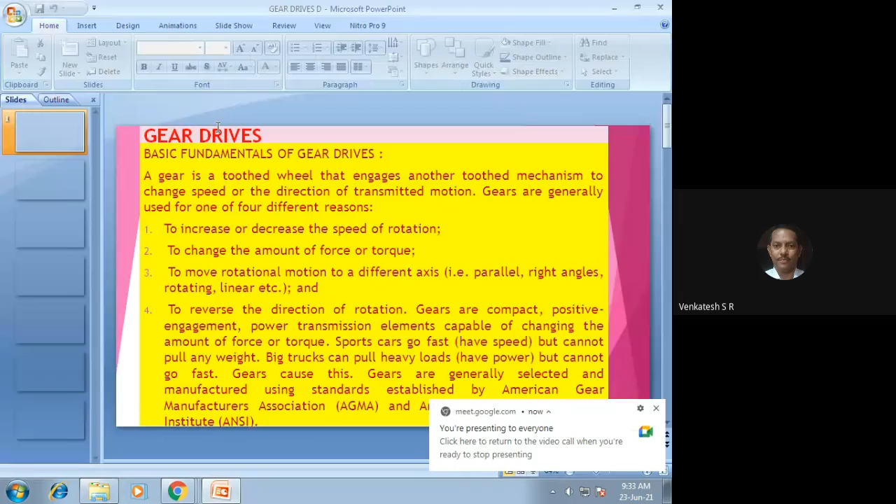See, yesterday due to some problem, it was stopped at helical gears. All of you observe. So this is the helical gear. If the shafts are parallel, at 0 degree, you can use the single helical gear set or herringbone gear set. In the examination, if you have this question, you write this diagram, no need to write this 3D diagram. You write this single helical gear set and show like this.

Usually this type of gear is used when the load is very, very high. For example, you might have seen the decorticator in the groundnut industry and oil industry. There they use helical gears for removing the oil from the seeds. They use helical gears because the load acting on the seeds is very, very high. This is the single helical gear set. In the examination, you have to write this diagram.

Next, come to the point, bevel gears. All of you write down bevel gears. Before that, write down helical gears. Helical gears are used for parallel shafts. The inclined line, the angle, this inclined line is called the helix angle. The inclination of this line is the helix angle.

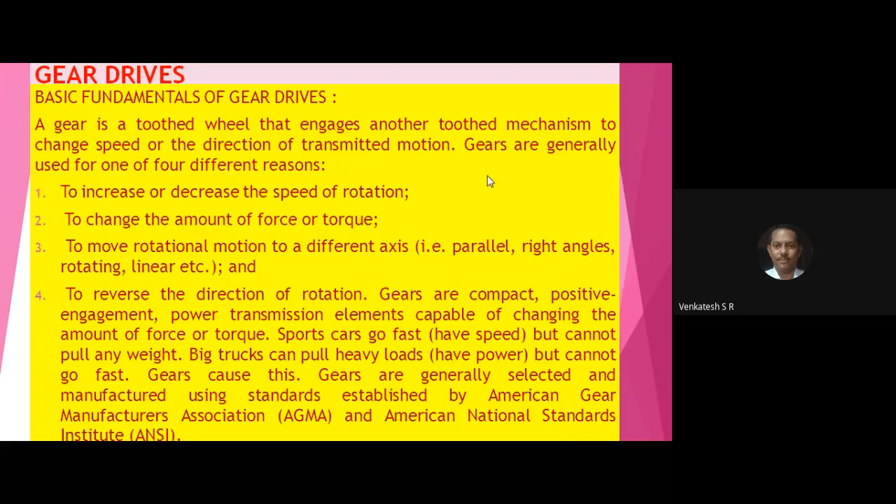Almost all question papers have this question in the examination. If you go through the previous 6 or 8 question papers, almost all of them have the question on gear drive. First portion of the question: what is gear drive? That is, transmit the power from one point to the other, or transmit the speed from one place to the other place, and the distance between the shaft is less, then only you can use gear drive. Otherwise, you can go for belt drive.

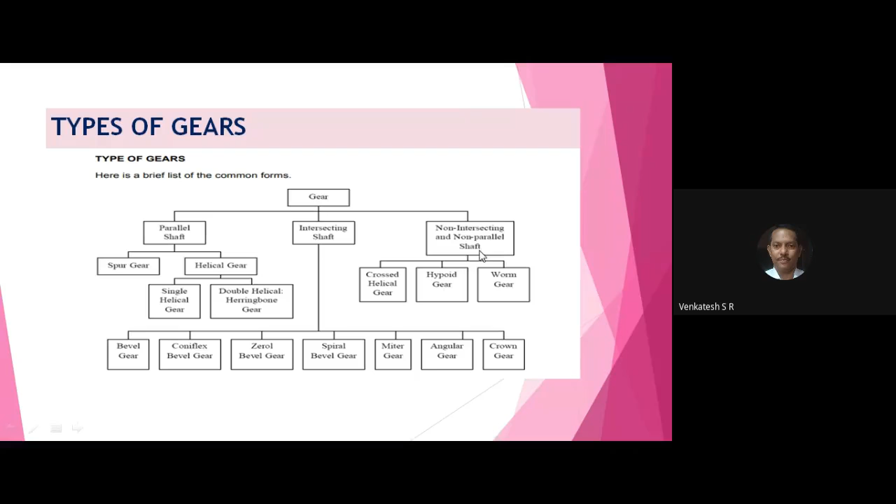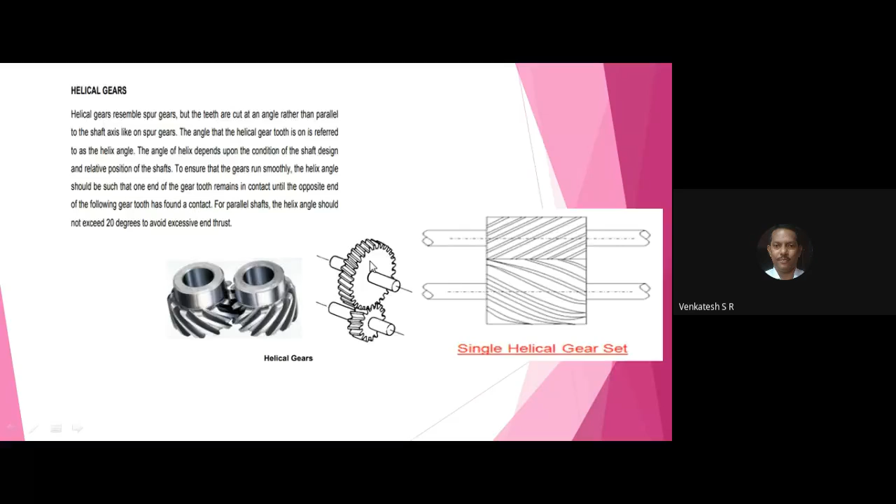In the types of gears, there are 3 types: parallel axis, intersecting axis, and non-parallel non-intersecting axis. According to that, you have the classification: parallel, intersecting, non-intersecting, non-parallel. Write the flow diagram or block diagram like this, and after that, explain briefly with a neat 2D sketch of a spur gear, helical gear, bevel gear, and worm gear.

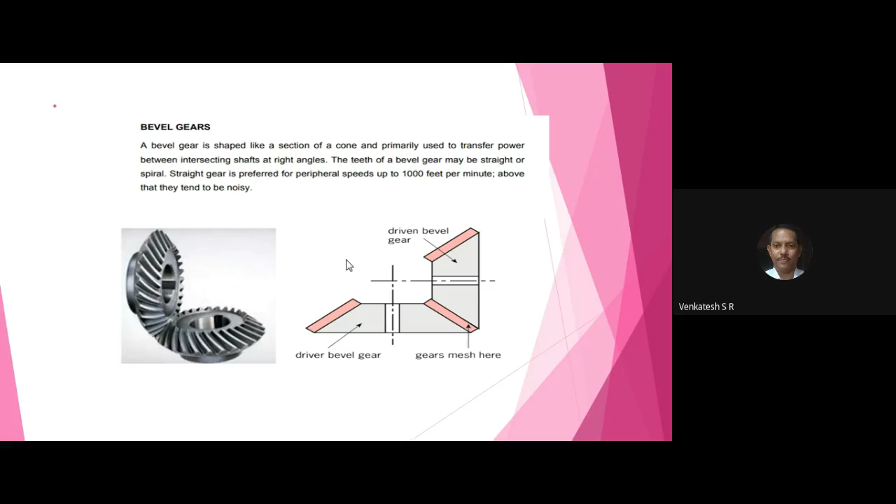This question carries 10 marks in the examination. You practice writing the diagram without observing the notes or textbook. Just go through the explanation and write the diagram. Write the explanation in your own sentence, no need to reproduce the same sentence. Writing in your own words carries more weightage than reproducing the same explanation.

This completes the gear drive.

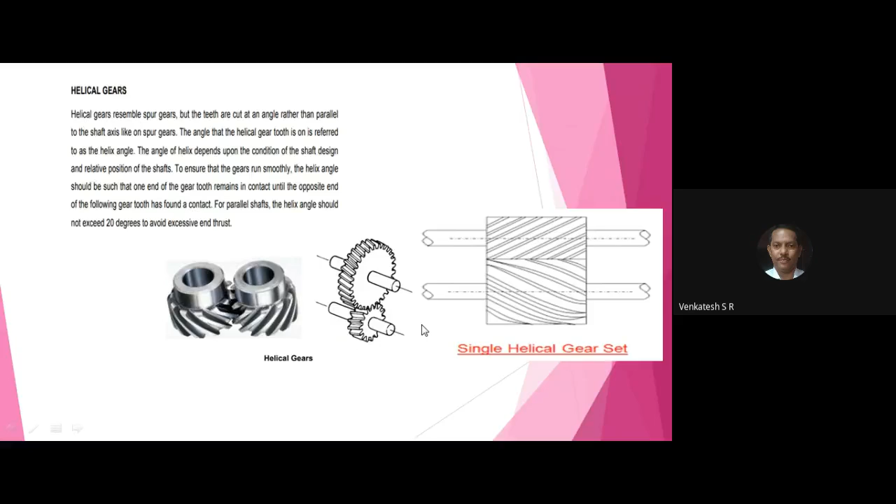One second. Now all of you please write down joining processes.

First point, write down the title: joining processes. First point, what is the necessity of joining parts or components?

And one more thing, without the joining process there is no life. Human beings require the joining process. Any item you take in your house, in the industry, or in the office uses joining processes. They are very much essential, joining of same type of material or different types of materials. That's very important, so without the joining process you cannot produce the component as a single piece. You can produce the parts individually and join them together to make the component. That's possible, that's very important.

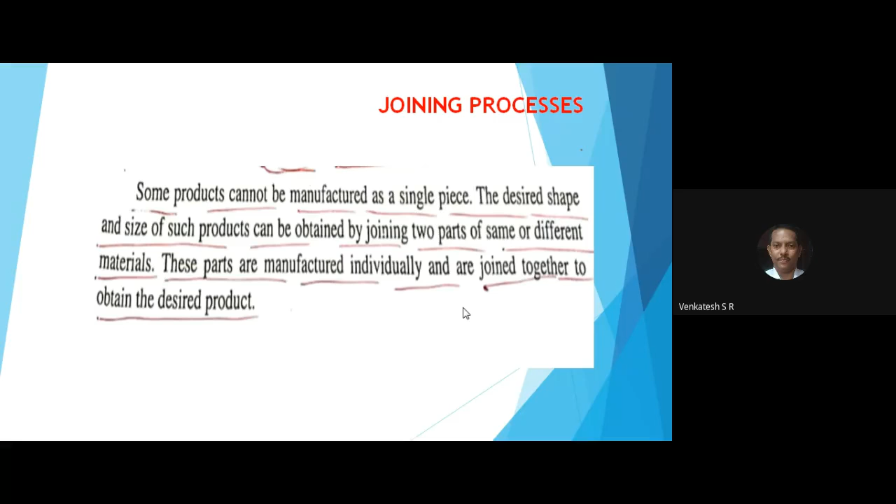These parts are manufactured individually and are joined together to obtain the desired product.

Next you write down a sentence: adhesive bonding, or using adhesive bonding, has less strength. You write down only this much: adhesive, using gum or synthetic resin gum. All of you heard the word Fevicol, the branded name of adhesive gum, Fevicol. It is actually a synthetic resin gum.

Adhesive bonding has less strength than soldering, comma, brazing, comma, welding, and mechanical fastening.

Using synthetic resin gum, if you join two parts, the joint can be removed anytime due to the effect of temperature or moisture, there may be chances of losing the joint. So for that reason, adhesive bonding has less strength than soldering, brazing, welding, and mechanical fastening. Mechanical fastening means using bolts, nuts, and washers.

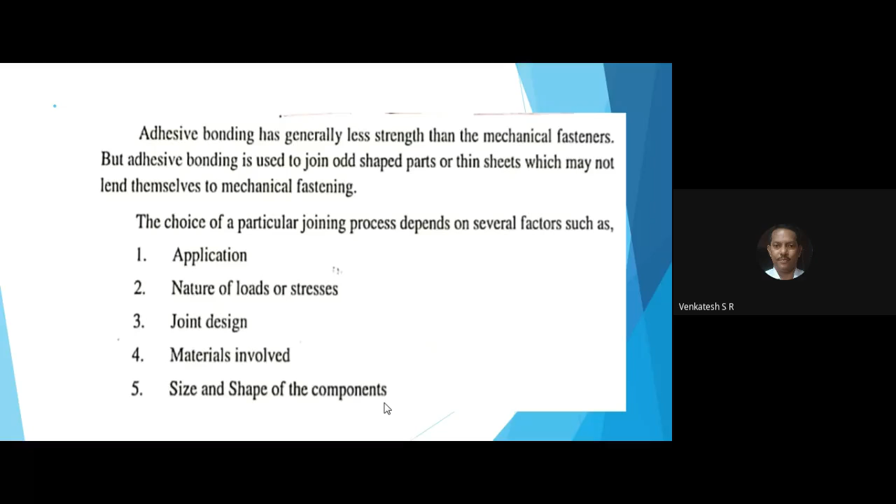Next, in the display you don't have the classification of welding process. Please write down classification of joining processes, underline that. You are all mechanical, civil, computer science or electronics engineers. Remember, if you write the title in uppercase letters, it indicates this is the title. From today onwards, in your lifetime, write all titles in uppercase letters, in any report, explanation or process. That itself says that this is the title.

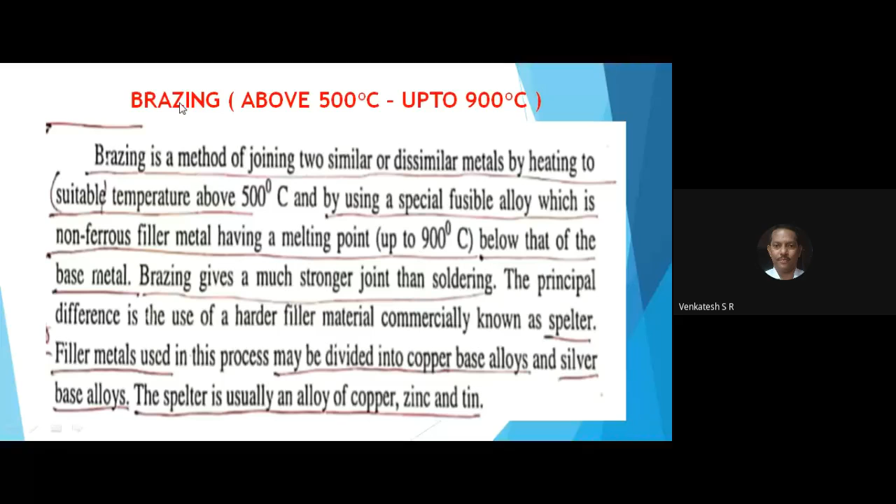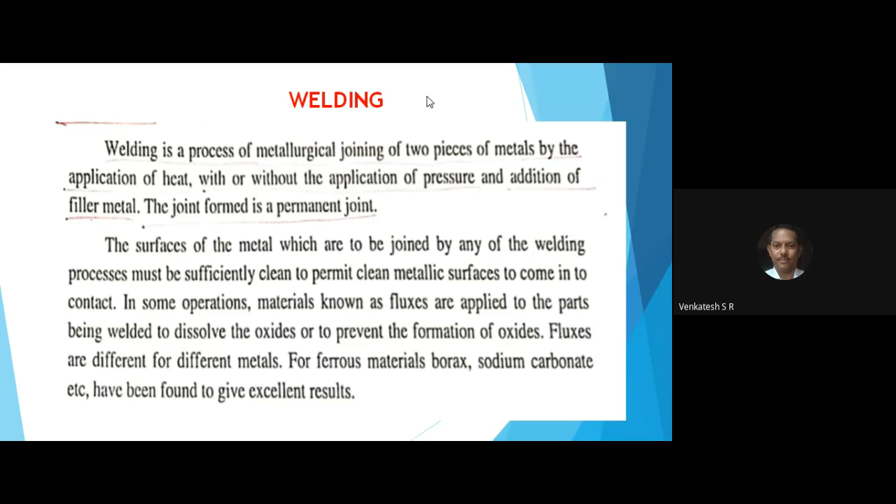Write down the explanation. The joining processes are classified into: next line, number 1, soldering. Number 2, brazing. Number 3, welding. Number 4, adhesive, A-D-H-E-S-I-V-E, adhesive joining process. Next line, number 5, mechanical fastening, F-A-S-T-E-N-I-N-G. Remember, the joining processes are classified into 5 categories.

First one, soldering process. Second one, brazing, B-R-A-Z-I-N-G. Third one, welding. Fourth one, adhesive bonding or adhesive joining. In bracket, write down synthetic resin gum, as you call Fevicol, close the bracket. Next line, number 5, mechanical fastening. In bracket, write down bolts and nuts. Two parts are joined by using bolts and nuts. That's called mechanical fastening.